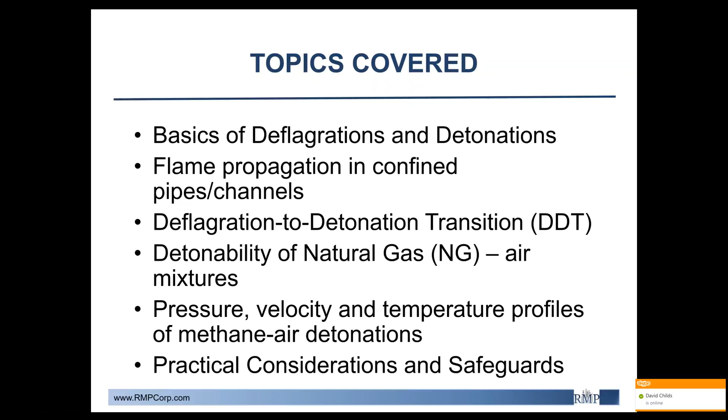Okay. So first up, we'll discuss deflagrations and detonations. So in an ignition, specifically in a pipe, we're talking about a combustion wave, so we have a reaction front that releases thermal and kinetic energy. And so this diffusion of energy and mass causes the wave to self-propagate. So if we're thinking a channel or a pipe, we're going to have a self-propagating wave. Deflagration is going to be a low subsonic velocity propagating combustion wave. Detonation, on the other hand, would be a supersonic combustion wave.

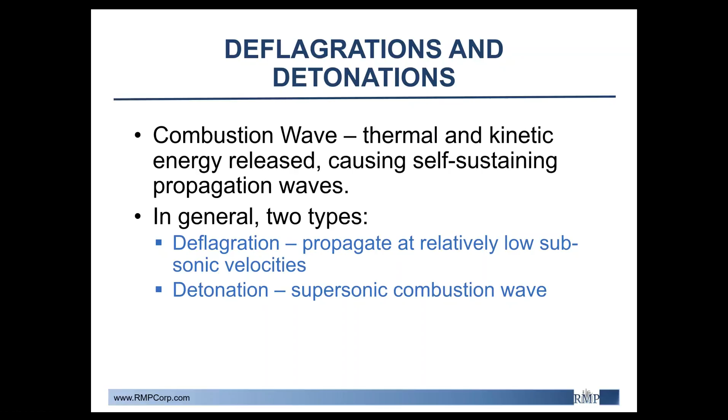So in a deflagration, let's say we have a wave at a certain subsonic velocity, our pressure waves would be able to interact with the non-reacted gas downstream before the reaction wave meets it, whereas in a detonation, it would be a supersonic wave, and so there would actually be no disturbance of the reactants before. And the YouTube video I have will help show this. Let me switch real quick. Okay.

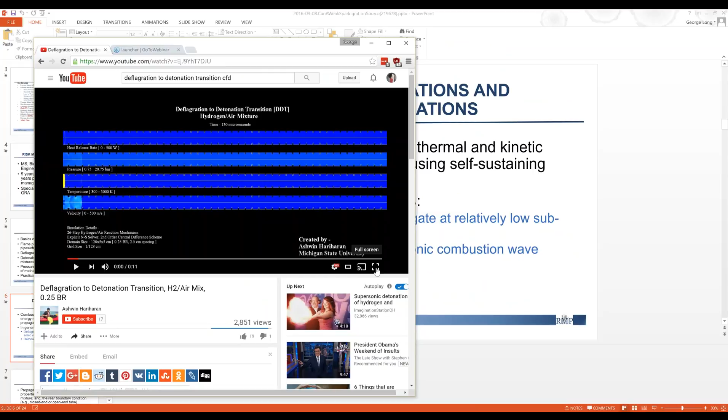All right. So here, as you can see, first we start off, and to explain this, the bottom row is our velocity, and the second row is our pressure. So you can see the pressure waves, we've transitioned to detonation, which you can see where the flame is by looking at the temperature profile on the third row and also the heat release rate on the first row. So when we're still in the deflagration range, we just had our ignition on the far left side. You can see that we're already getting propagation into the unreacted components downstream.

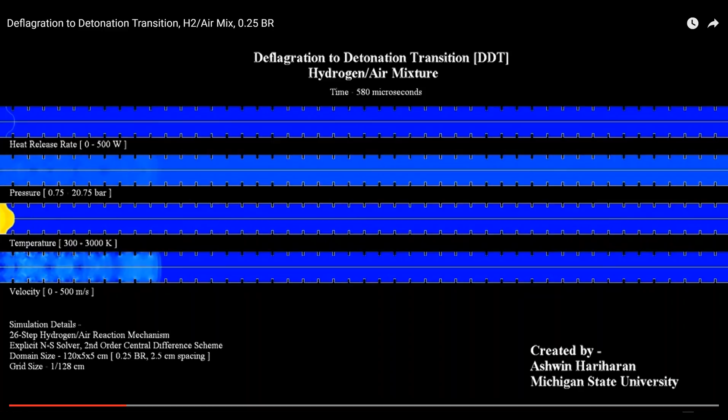Now, as we continue to follow this, you can see that the temperature and the heat release rate start to speed up with respect to time. So this is stepping through in microseconds. And at a certain point, you're going to see how all four components start to hit the exact same speed. But right now, we're still in the deflagration regime, and you can see how the pressure waves are affecting the velocity much further downstream of the combustion front than maybe expected just thinking about it.

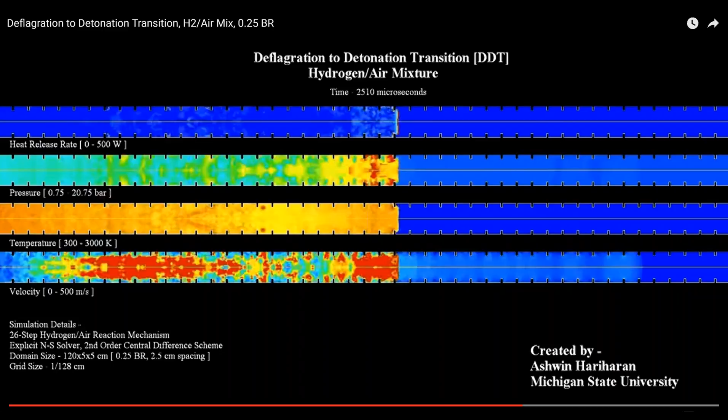So as we go, here we go. So now we meet detonation. And as you can notice here, there's a run-up distance. So if it's a weak ignition source, we're not going to have immediate detonation. You need some amount of distance for the turbulence, the instabilities, to really feed that reaction front and cause this transition. And in general, the rule is around half the theoretical detonation velocity is where you can start to get like a quasi-detonation regime. But at this point, we're traveling supersonic, and you can see how all of the fronts match up together. So if you keep going on this, then it meets the end.

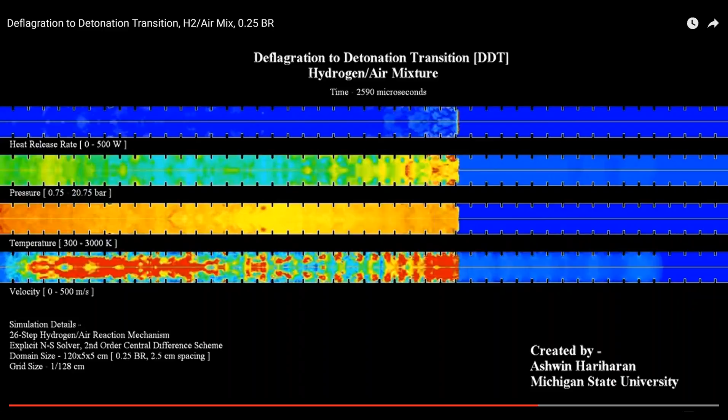Now, oh, awesome. Okay. So let me go back.

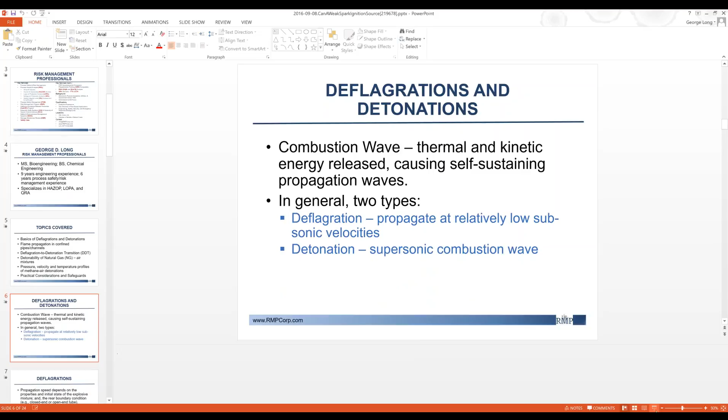All right. Okay. So as I was just saying, in deflagrations, the propagation speed depends not only on the initial state of the mixture. So, if we're looking at methane and air, around 5% to 15% methane and air will be our flammability limits. And so that will depend also on the size of the confinement. But let's just say, the closer to stoichiometric, the easier we could achieve detonation.

But not only this, it's also going to depend on the rear boundary condition, because what you can actually have are these pressure wave reflections that can bounce off of both the front and rear end and then come back and help encourage the instability that the reaction front actually sees as it travels through.

So let's say you have an ignition source at one end and then your wave front travels to the other end of the piece of pipe that's closed. Well, that closed end will actually be able to reflect the pressure wave and then cause this buildup. And you'll see pressure spikes as well, and you also have transverse pressure waves as the speed increases and you get that compression of the gas as it travels through the pipe. Okay.

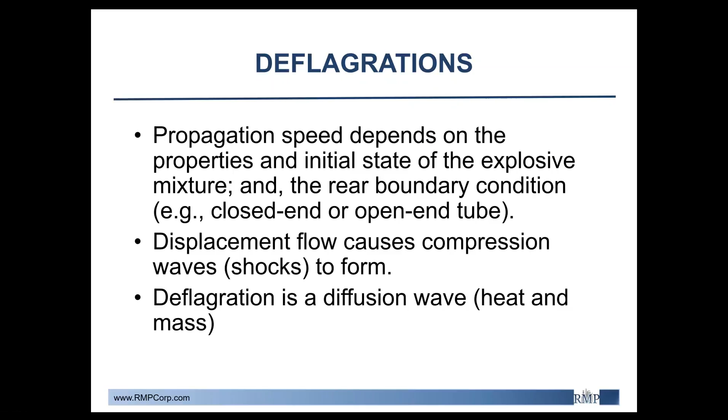And so deflagration we can think of as a diffusion wave. So the heat and mass gradient at the flame front is what self-propagates the deflagration. Now, here is another nice little illustration. So here we have an ignition source. We have our flame front. So at the flame front, the reaction causes energy to be released, heat to be released. We get expansion right at that front.

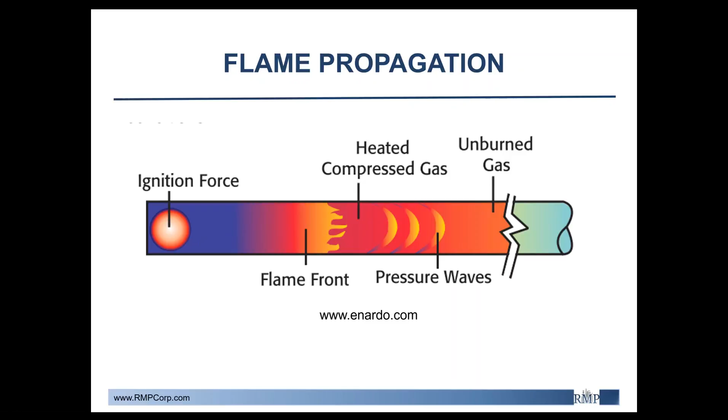And so let's say we had a closed end. Well, our combustion products, so anything upstream of the flame front, don't have anywhere to go, right? But let's say we had an open end on that end. Well, in that case, you actually have combustion products flowing against the direction of the flame front. But in this case, you would have the compressed gas pushing the reactants downstream to the unburned gas. You get pressure waves, and as that occurs, instabilities will continue to generate until you reach a point where you transition to detonation.

Detonation, on the other hand, is a supersonic combustion wave, and you can think of it as a shock wave that is also reacting. It transforms the reactants into the products, and then there's also an energy release. So another way to think about it is you have a shock front traveling through the pipe, and behind it is a chemical reaction zone, which can also be described similar to the deflagration zone. However, the strong compression, adiabatic heating of the leading shock is what propagates the ignition.

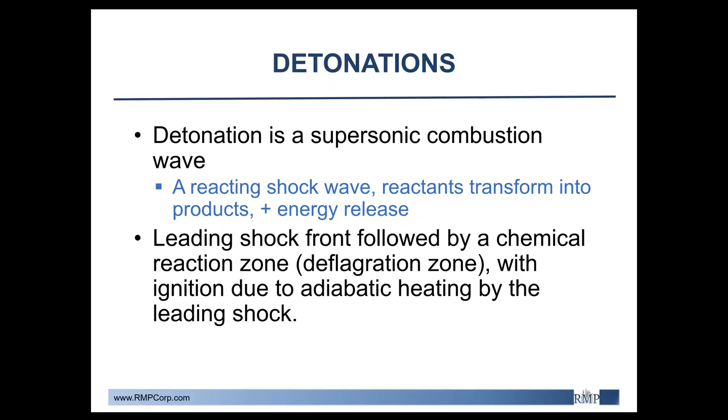Okay. All right. So the reason that we get this flame acceleration is that self-propagating deflagrations are intrinsically unstable. And there are many different instability mechanisms that all feed off of each other. But as you may have noticed in the YouTube video, the channel was not smooth. They put these little steps. So you get a forward-facing and reverse-facing step staggered at consistent intervals, which causes the flow regime to destabilize quicker than you would in a smooth tube.

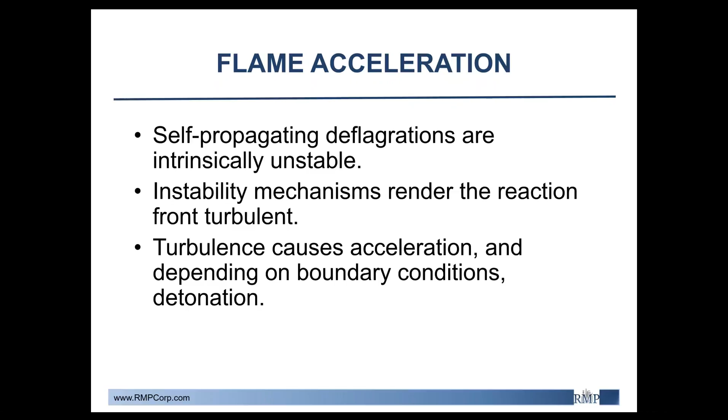And so what you end up seeing is that run-up distances, so the distance between the deflagration from the ignition and the detonation, will be shorter as you increase your obstacles and your instabilities due to the flow. So the instabilities cause the reaction front to become turbulent, which increases the amount of fuel burned at any given moment. This continues to feed the acceleration, and then depending on if our setup is able to achieve detonation, then it could occur.

All right. So the DDT, deflagration to detonation transition. So, like I said, this is affected by boundary conditions. So, how long is our piece of pipe? What's the thickness at the walls? How wide is our radius or our diameter? All of these things can affect it. And so around half of the detonation velocity is what has been shown experimentally to transition from deflagration to detonation in smooth tubes. Instability mechanisms can include Landau-Darrieus thermal expansion instability, thermal diffusion, and pressure wave reflections, among many other flow-related instabilities.

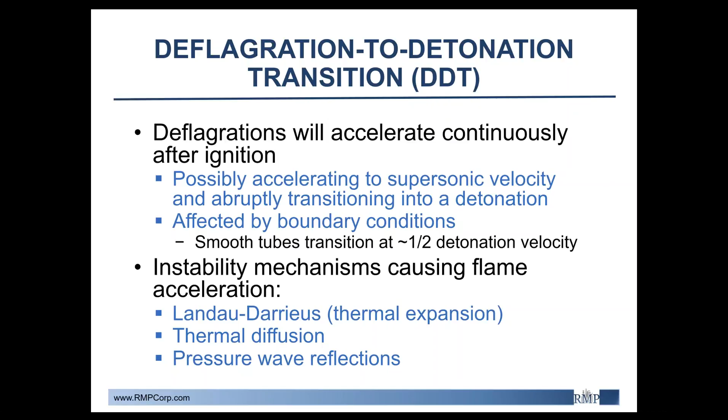Okay, so at the onset of detonation, there are many different theories and methods to achieve detonation. So once we are transitioning at the detonation point, you can get local hotspots or explosion centers. You can also have a compression pulse or detonation bubbles, where the transverse pressure waves start to form actual bubbles that can then detonate. And there are helical detonations along the surface of the pipe.

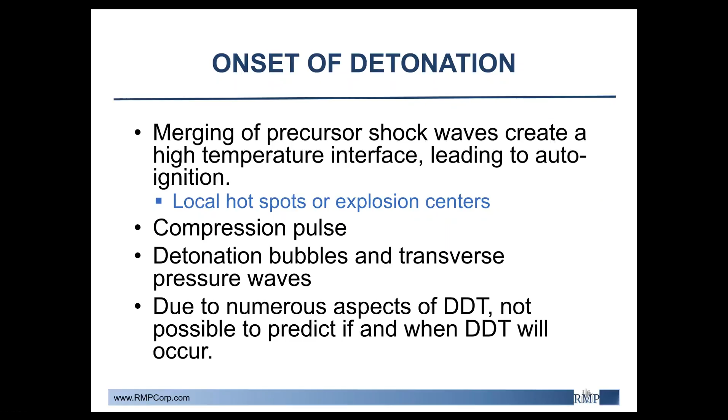But because there are so many different ways that we can achieve detonation, it is really not possible to predict if and when DDT will occur. So when you're running a CFD model, you'll run really a stochastic set of boundary conditions and inlet or initiation conditions in order to achieve a percentage of the probability for seeing DDT.

All right. So unlike DDT, this is direct initiation of detonation. This is where the actual event that causes the ignition is supersonic, allowing for immediate detonation. So then you don't have any deflagration regime. It just immediately starts at supersonic flow. So, for example, explosive charges; they can also use detonation tubes to get a planar detonation from a reflected shock wave.

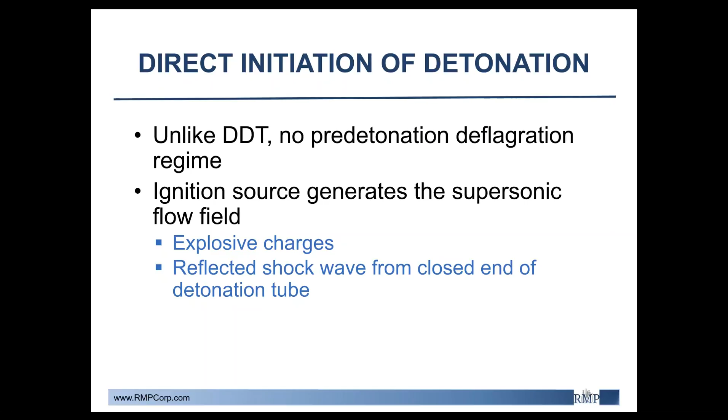Some theoretical estimates. So really the first one that you learn about is the CJ condition, Chapman-Jouguet, which assumes that detonation propagates such that the reacting gases reach sonic velocity as the reaction ceases. There's a ZND detonation model. So that's a one-dimensional model. You can go all the way to 3D, multi-component, CFD mathematical models that you can then iterate and solve.

But really, for the purposes of matching experimental results to peak pressures, they have been pretty good, at least with natural gas. If you look at the CJ pressure and CJ velocity, it does match up pretty well with the detonation experimental results that have been seen at the Naval Research Laboratory.

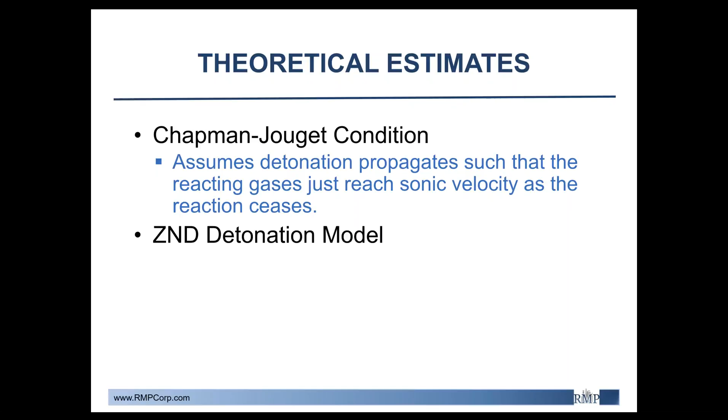Okay. All right, so now we'll jump over to methane and air mixtures. So what can influence the detonability of a methane-air mixture? Some conditions can include the composition of the mixture. So if we're at the lean or the rich side, say 5% or 15% methane in air, then that's going to be more difficult to detonate than, let's say, right around 8 to 9% methane in air. Pressure and temperature, so initial conditions, will affect it.

In fact, they've shown that higher initial temperatures actually increase the run-up distance for the deflagration to detonation transition. Also, the size of the confinement. So the smaller the diameter of the pipe or the channel, the harder it will be to achieve detonation. The smallest pipe size that experimentally has resulted in detonation, I believe, is 1.4 inches, and the largest is around 41 inches.

And at the largest size, really the whole range of flammable concentrations could be detonated. So 5 to 15% they were able to detonate, whereas at 1.4 inches, you really had to have a stoichiometric mixture, and that was it. So you're going to be in a much tighter range the smaller the diameter is. And I have a graph for that in a second. And also the method of detonation initiation. A strong ignition source is going to promote DDT or detonability much more than a weak ignition source will.

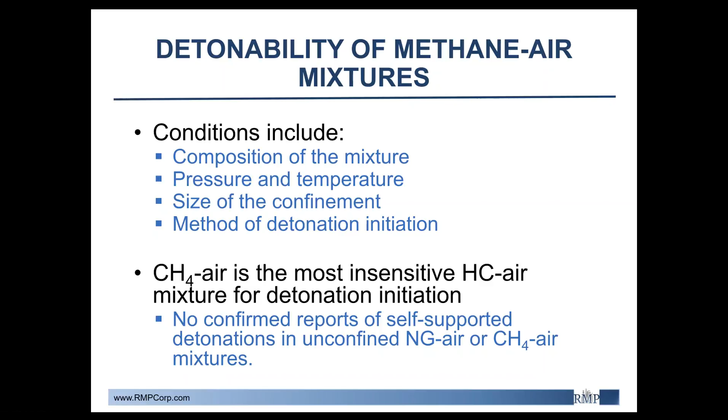And before we jump to that, there are no confirmed reports of a self-supported detonation in an unconfined natural gas and air mixture. So they've done experiments with an unconfined cloud. They'll use a high explosive charge, and really the pressure waves decay. There's no self-sustained detonation once that initial initiation event decays. So, at least with methane and air, you need some kind of confinement in order to achieve those detonation pressures. Okay. However, that does not mean that detonations cannot occur, and so that's really the misconception.

DDT has been shown experimentally, theoretically, in smooth and obstructed channels. Also, let's say you were to use a more sensitive gas mixture. Sometimes they'll use a hydrogen-oxygen mixture to start the detonation, and then it can promote the DDT in methane and air. And like I said, the smallest tube diameter is 1.4 inches.

So even small diameter piping could be susceptible to DDT, especially if the run-up distance for small diameter piping is on the order of around 5 to 10 diameters. So we're only talking a couple of feet that would be enough, even in a smooth channel, to see this detonation.

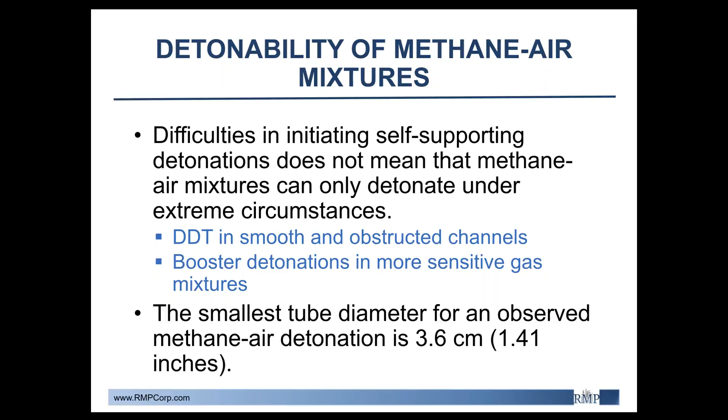And then as you get wider in the channel, it really reaches the point where anywhere in the flammable range in methane and air, you could also see detonation. However, for smaller channels, even if you're in the flammability range, you may not be in the detonation range. So that's something to think about.

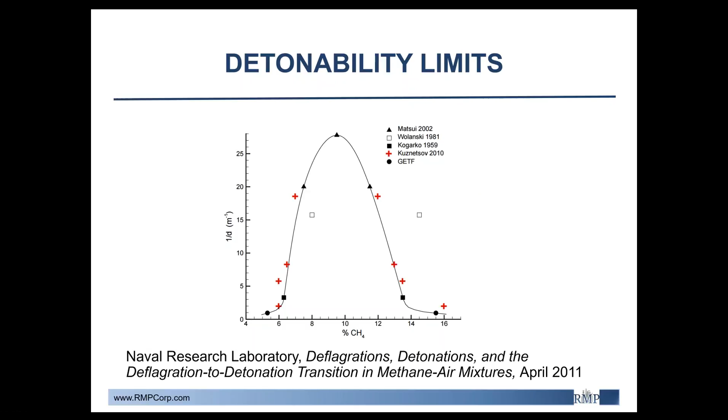Okay. As far as natural gas composition, it can range from 82 to around 99% methane by volume. It includes ethane, propane, and higher hydrocarbons. Carbon dioxide and nitrogen may be present, and this all introduces uncertainty into the detonability of a natural gas for a specific facility or system. Some studies have looked specifically at ethane concentration, and they've seen that a high ethane content will bring down the initiation energy to achieve detonation.

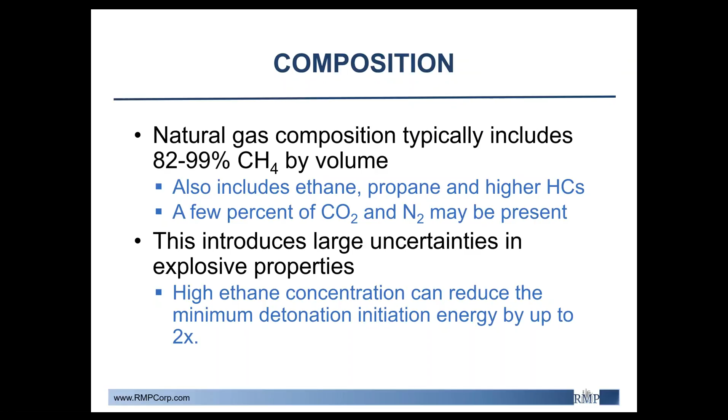So you could have 2 different experiments running side by side with 2 different sources of natural gas, and they could have totally different results. So it's something to think about. In a controlled experiment, you may see that the minimum diameter is 1.4 inches for achieving DDT in pipes, but for a specific facility, you could have a range of compositions of natural gas, and so we don't want to say that definitely any 1 1/4 inch and below pipes are okay and we don't have to worry about this problem, because we don't know yet, really.

All right, so some observations. A weak ignition source will not cause a detonation of an unconfined natural gas in air cloud. But in channels, anywhere from 1 point something inches all the way up to the 41 inches, which is the gas explosion test facility that the Naval Research Laboratory hosted, you could achieve detonation with a weak ignition source, depending on the composition of the natural gas, the run-up distance, and also the boundary conditions for the channel.

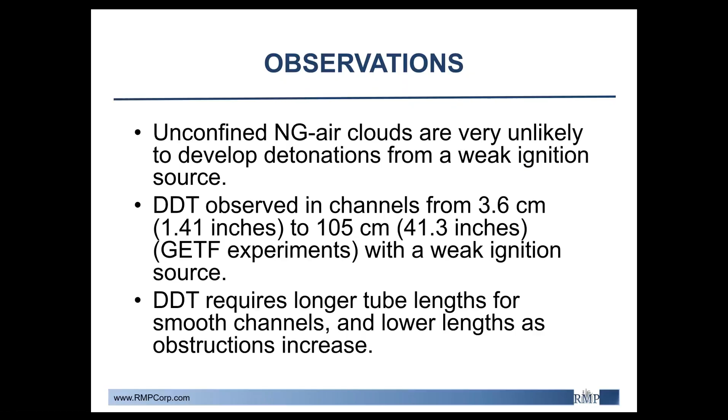You could get that. And so for smoother channels, things that have fewer methods of invoking turbulence, you're going to need longer run-up lengths, so you're going to need more time for that deflagration to transition to detonation than you would if there were more obstructions in the pipe or channel. Okay.

Some variables to look at. These are all atmospheric pressure and ambient temperature as the initial pressure and temperature for these studies, and they were able to see for natural gas and air detonations 1,400 to 1,800 meters per second flame velocities. Pressures: this is an atmospheric detonation tube, so they have one closed end, one open end. And they got over 250 psi, and also temperatures up to 3,500 Fahrenheit.

250 psi may not sound like a lot if we're looking at carbon steel piping. You guys aren't too worried about it, depending on what you are using. But pressure wave reflections, like we talked about, let's say you have an ignition source, and now you have a closed end away from the ignition source. Here you can get these reflections that can cause instantaneous localized pressures that can peak at 2 to 5 times the pressures just quoted here. So instead of 200, 250 psi, you could have instantaneous pressure of 500, even over 1,000 psi. So definitely at that point, you would be worried about potentially damaging piping.

Some other practical considerations. So if we have a detonation combustion wave traveling through pipe, it's going to have a lot of mass, a lot of momentum, and anything that can change that direction could potentially be damaged. So even if the pipe can withstand the pressures, 250 psi pressures, pipe bends, shut-off valves, blower housings, or even the flame arrestors themselves could be damaged by the momentum pressure of the wave.

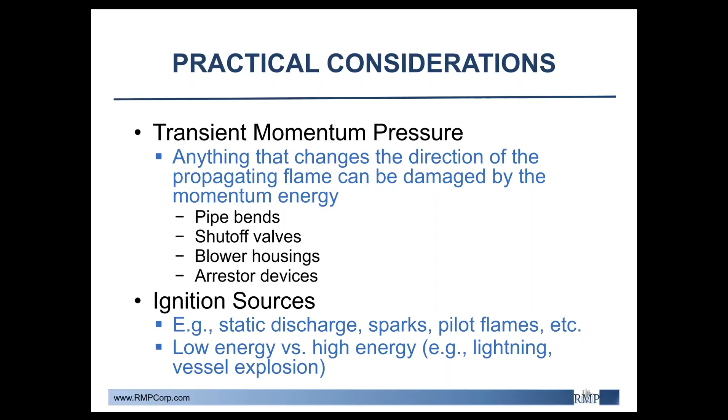And also, a lot of the times when you do have like a pipe failure due to this, the incident investigation will typically find that there have been multiple events where this has occurred, and it slowly weakens the integrity of your system before you finally have that failure.

All right. So here we have flame arrestors and detonation flame arrestors. So what do we want to do to stop our self-propagating wave? If we're looking at a deflagration, it's going to be subsonic, and so we have that diffusion of heat and mass that propagates it. So what we want to do is take away as much heat as possible, so that the flame will stop propagating.

So the difference between a flame arrestor and a detonation flame arrestor: all that additional momentum and heat that we talked about with detonations that can compromise the integrity of the system can also damage a traditional flame arrestor. So you can buy a flame arrestor for any type of system, and the detonation flame arrestors are designed to handle that additional load.